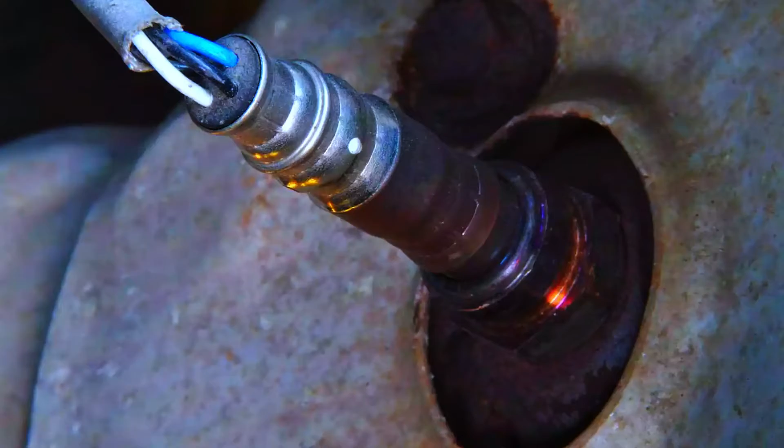Today's code is P0063, which means your car's computer detected a problem with the oxygen sensor heater circuit. Now, fixing this yourself can be a bit tricky, but it's not impossible. So, we'll break down what the code means and what you can try at home. But remember, if things get complicated, it's always best to consult a mechanic.

P0063 indicates a low voltage in the heater circuit for oxygen sensor number 3 on bank 2. Most cars have 2 banks of cylinders, and bank 2 is usually on the side with cylinder number 2. Oxygen sensors help regulate air-fuel mixture, and the heater ensures they reach operating temperature quickly.

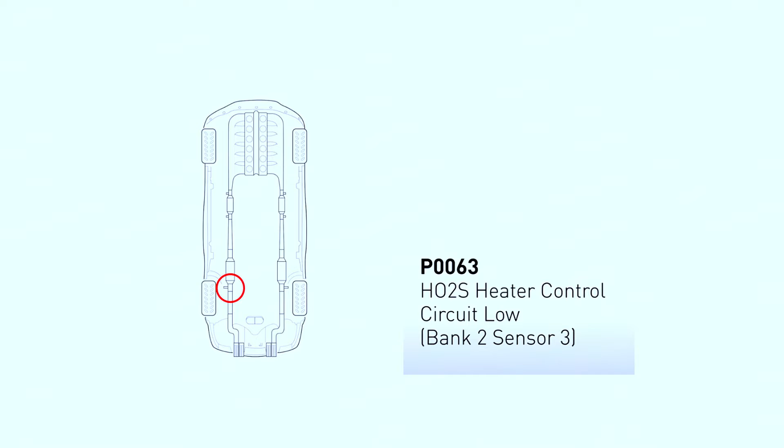Here are some signs to watch out for: illuminated check engine light, decreased fuel efficiency, increased emissions, rough idling, reduced engine performance.

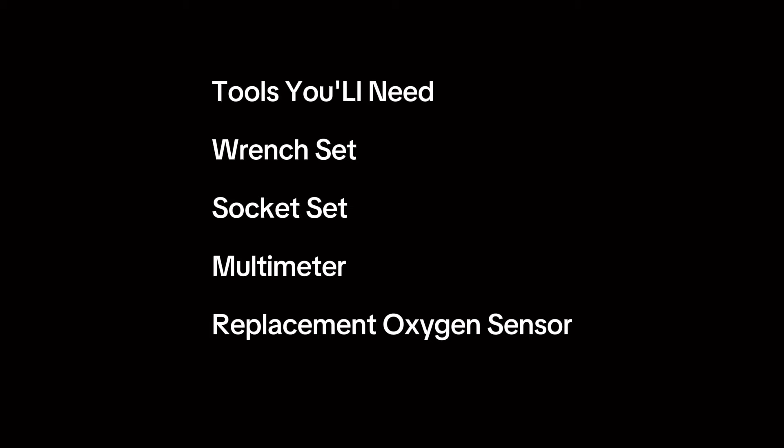Tools you'll need: wrench set, socket set depending on sensor location, multimeter optional for testing, replacement oxygen sensor; consult your car's manual for the right part. Safety first. Always work on a cool car and park on a level surface. Disconnect the negative battery terminal for electrical safety.

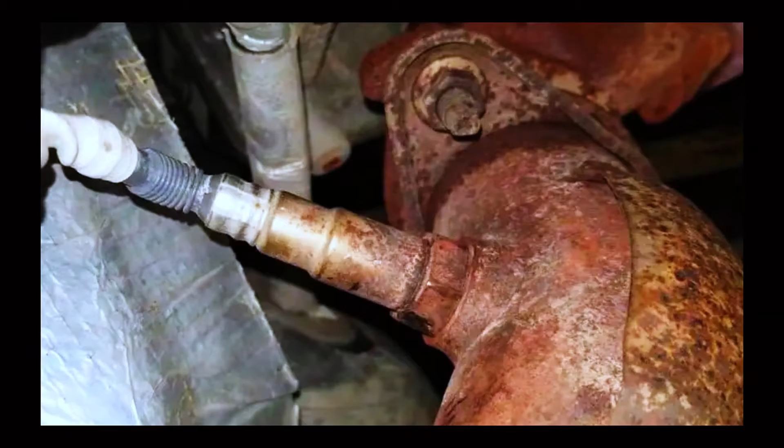Before diving in, check for any loose or damaged wiring around the oxygen sensor. Look for exhaust leaks near the sensor as well, which can mess with readings. If the wiring seems okay, we can suspect a faulty sensor or a blown fuse. Consult your car's repair manual to locate the fuse for the oxygen sensor heater circuit and check it with a tester.

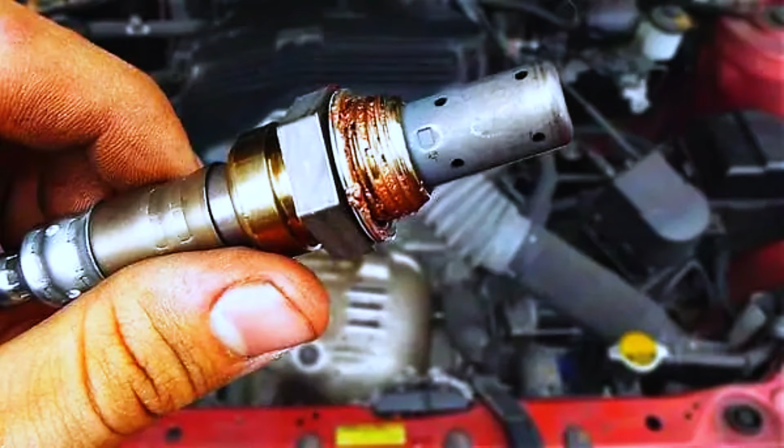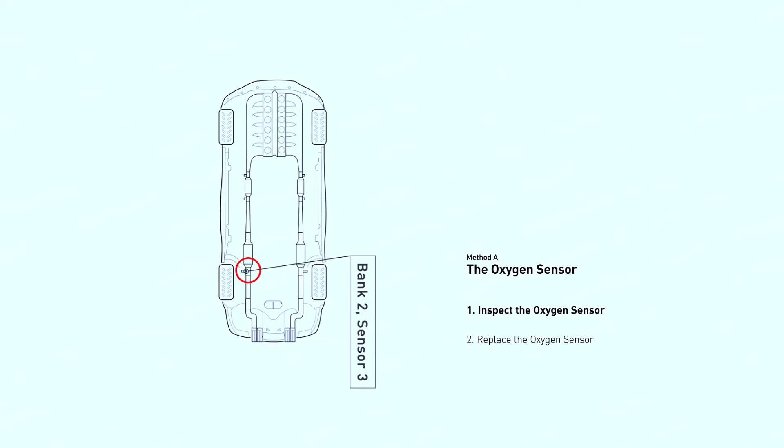Locating the sensor. Refer to your car's repair manual to find the exact location of bank 2 sensor 3. It's usually screwed into the exhaust pipe near the catalytic converter. Visual inspection. Once you find it, check the wiring harness for any damage or corrosion. Look for burnt or melted connectors. If the wiring seems okay, we can move on to the next step.

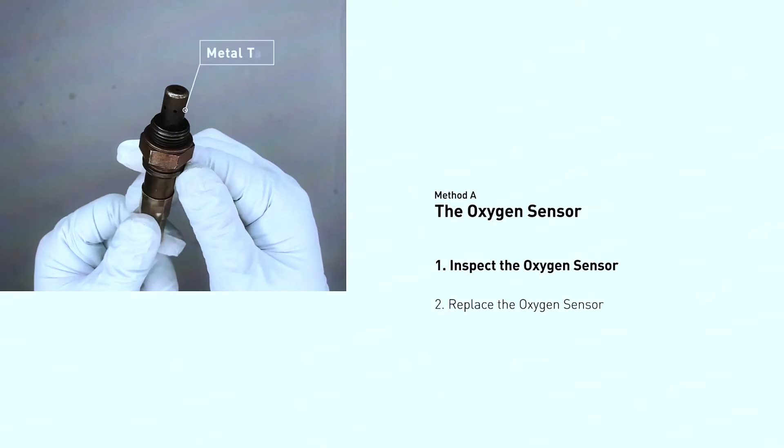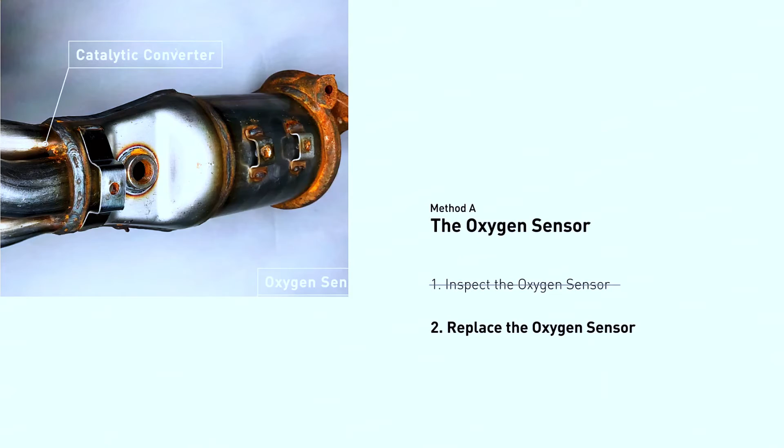Replacing the sensor. Use the appropriate wrench or socket to remove the faulty sensor. Be careful, it might be tight. Screw in the new sensor hand tight first, then tighten it with the wrench following the recommended torque specifications. Refer to the manual. Reconnect the wiring harness.

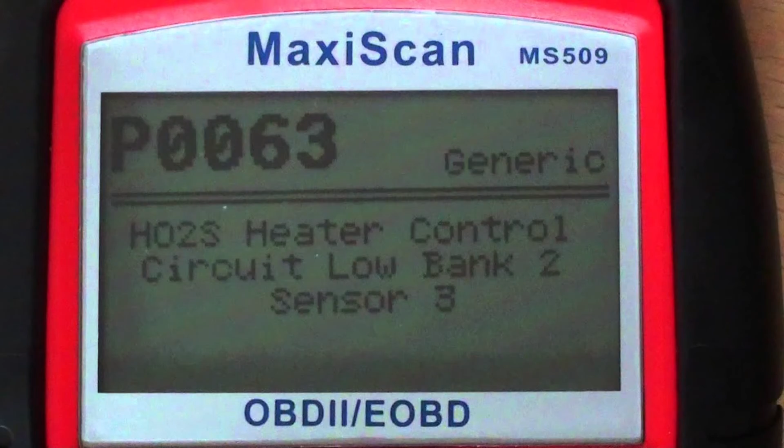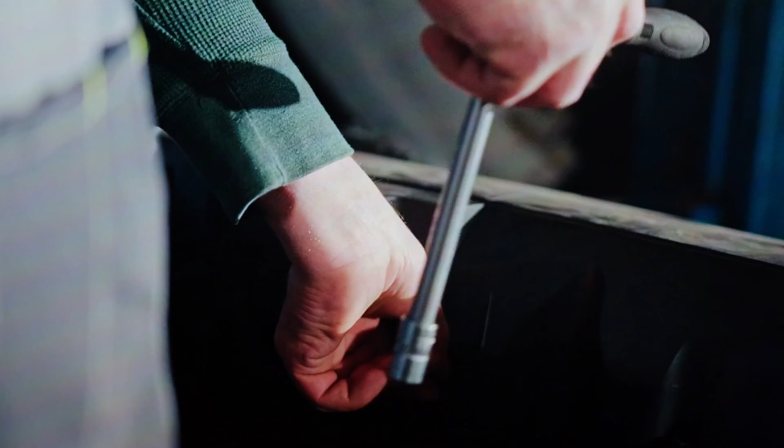Once you've replaced the sensor or fixed the wiring, use your OBD-II scanner to clear the P0063 code. Then test drive your car and see if the code comes back. If you're not comfortable replacing the sensor yourself, or if the fix doesn't clear the code, don't hesitate to take your car to a trusted mechanic. They can diagnose the problem accurately and get your car running smoothly again.

Thanks for joining me. I hope this video helped you understand and potentially fix the P0063 code. Remember, if things get too complex, a mechanic is always there to help.